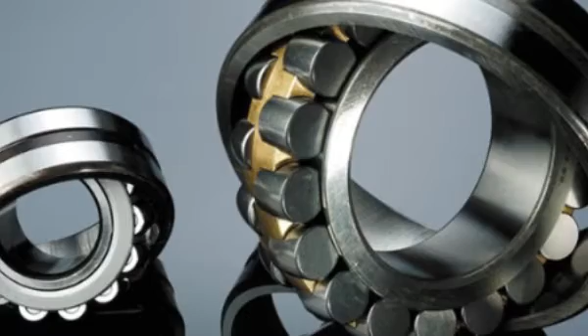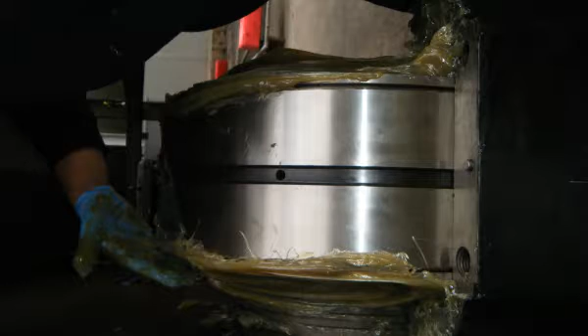Lubricating rolling bearings is one maintenance task that deserves our attention. For those involved with reliability, asset longevity, and energy conservation, getting this job done right means everything. Still, lubrication of rolling element bearings remains a misunderstood and abused task. Can it be true that 40% of all bearings never live to their engineered life cycle, and bad lubrication practices are the leading cause of this infant mortality?

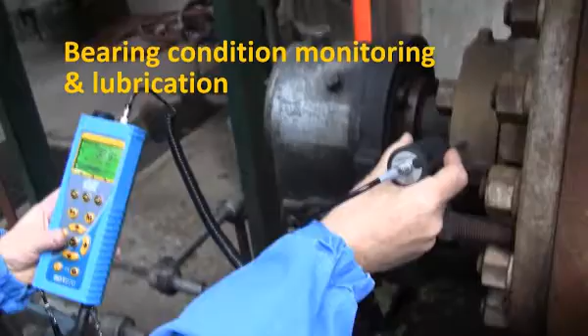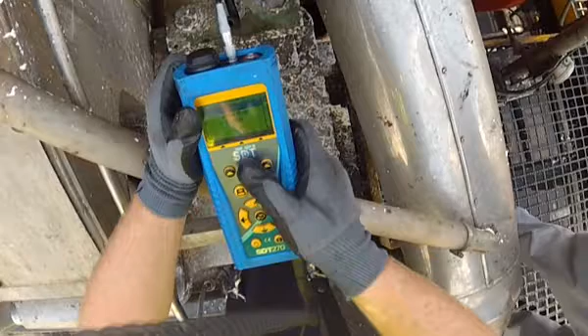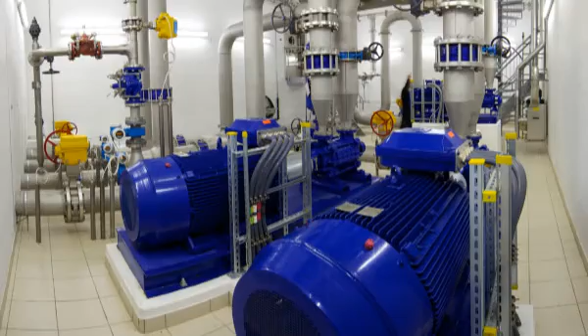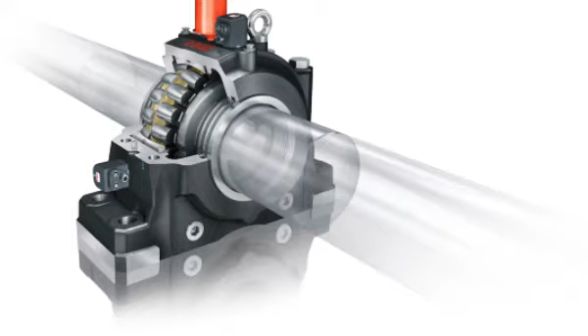Friction is all around us. Without it, we'd find it very difficult to run, walk, or even stand on our own two feet. We need friction to drive our cars and fly our airplanes, and we need friction for our motors to drive pumps. But when it comes to our plant, machinery friction is both friend and foe. If part of your job is greasing plant machinery, then you know well the battle against frictional forces that threaten the useful life of rolling element bearings. And you definitely want to avoid these three common lubrication mistakes.

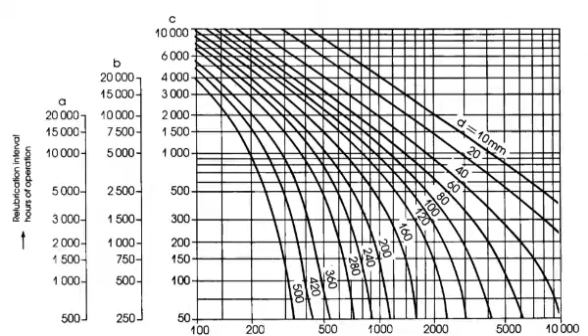Mistake number one: scheduling lubrication tasks on a calendar basis instead of a conditional basis. Greasing a bearing once per week or once a month may seem like a sensible thing to do. After all, performing scheduled maintenance at regular periods is an age-old concept ingrained early on. Even OEMs still advise best practices based on time intervals to ensure maximum asset lifespan. Are they right? Or does their advice steer us in the wrong direction?

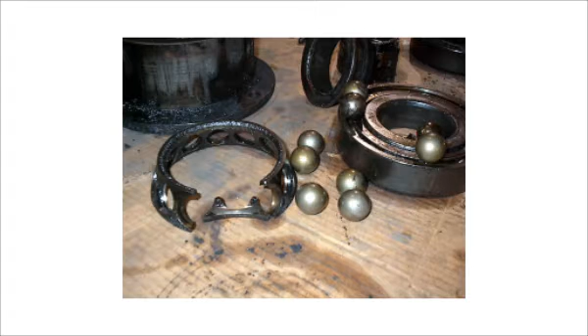Bearings need grease for one reason only: to reduce friction. As long as the lubricant is performing that service well, there should be no need to change it or add more. Yet we frequently do, with potentially catastrophic results. Relubricating a bearing just because your calendar told you time's up is the first mistake you must avoid. Don't let your calendar overrule common sense. Instead, monitor, measure, and trend friction levels and predict precisely the right time to grease.

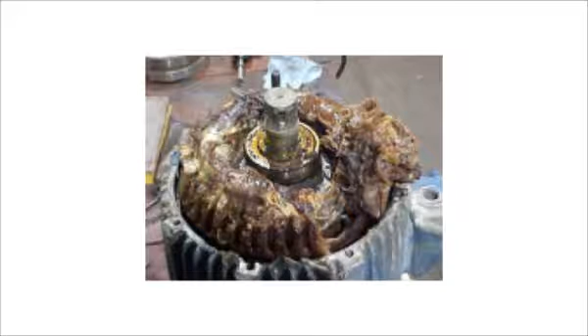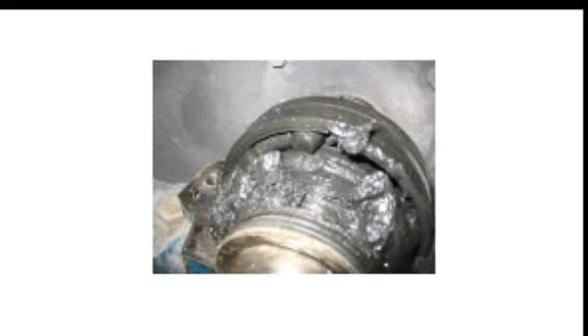The second mistake is adding the wrong amount of grease. Sometimes we add too much, other times not enough. Both are wrong. Too much grease builds pressure, pushing the rolling elements through the fluid film and against the outer race. The bearing has to work much harder to push the rolling elements through a mud bog of grease.

Imagine for a second you're running along a beach, ankle deep in water. Your legs effortlessly drive your feet with each step while a small amount of water splashes coolly around your ankles. You feel as though you could run forever and never get tired. Now imagine running knee-deep or even waist-deep in water. Your legs tire quickly. The water surrounds you and makes movement feel awkward and unnatural. You might grunt, you might groan and strain until, after a few seconds, you give up from exhaustion.

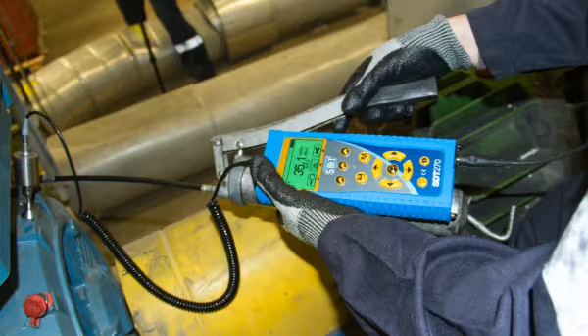A bearing drowning in grease will run hot. Excessive heat breaks down the grease. The whole system is an inefficient waste of energy. How do we avoid this mistake and stop at just the right amount of grease? By monitoring the bearing's friction level with ultrasound as new grease is being applied. As new grease flows into the bearing cavity, a measurable change in ultrasound levels is measured, heard, and recorded with an SDT LubeTech kit. As the decibel level approaches normal baselines and stabilizes, you know only the needed amount of grease has been added.

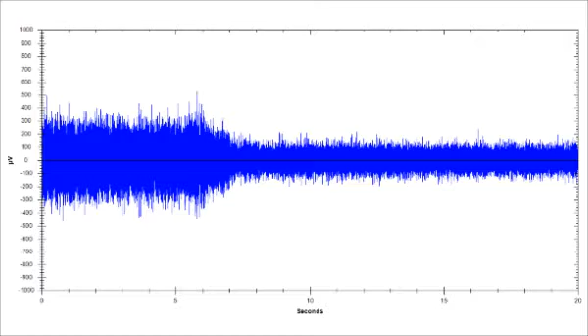Like any job, there's a right way and a wrong way to do things. Simply listening to a bearing with an ultrasound device that gives no quantitative feedback is a recipe for disaster. The audible feedback is too subjective to draw any comparative conclusions. No two people hear the same, and there's no way to remember what the bearing sounded like a month ago.

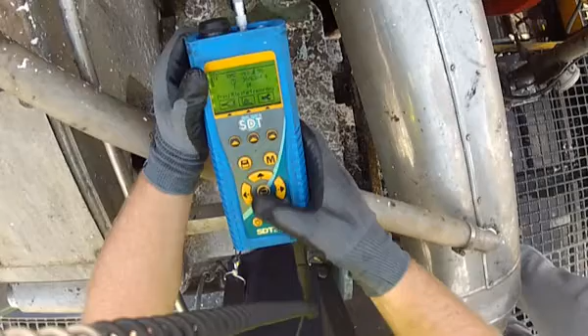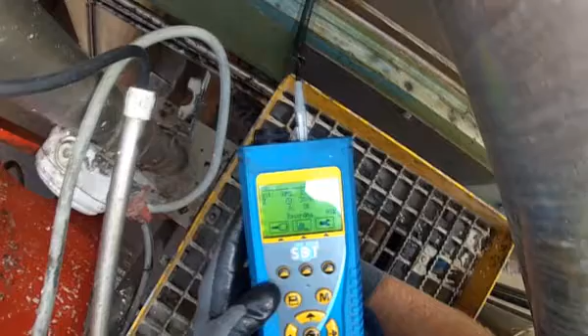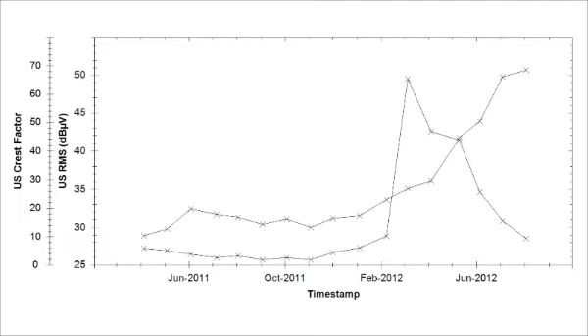So what's mistake number three? Sacrificing quality for price. Always use an ultrasound instrument that provides a digital decibel measurement. Do not rely on stethoscopes, screwdrivers, and listen-only ultrasound instruments. Better still, use a device that provides multiple condition indicators. Max and peak RMS decibel measurements indicate alarm levels and greasing intervals, while ultrasonic crest factor provides insight about the bearing condition in relation to its lubricant. Crest factor helps us differentiate between bearings that need grease and bearings that need to be replaced.

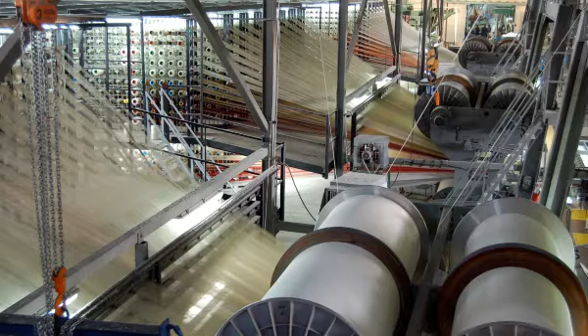Bearings reside in noisy places—deafening, really, with so many sources of noise coming from all directions. Humans are simply incapable of filtering the sound of a grease-starved bearing from other sounds. Even if we could, how would we measure the results, or compare what we hear today against what was heard a month ago? The days of listening to a bearing with a stethoscope, screwdriver, or broomstick are over.

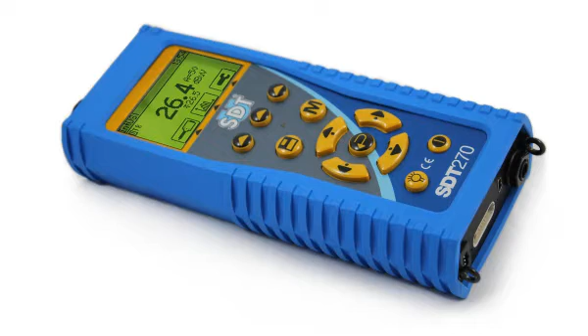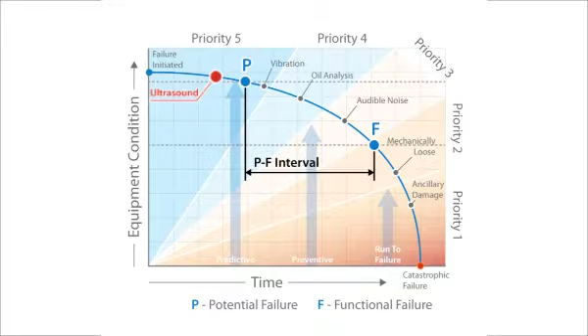There's just too much at stake to rely on antiquated methods. But noisy environments are where high-quality ultrasound instruments thrive—these are the challenging situations they were built for. Take, for example, the SDT-270. It hears above the noise of the factory floor and concentrates on a narrow band of ultrasonic frequencies. Friction and bearing defects first reveal themselves in this frequency range. The SDT-270 accurately filters, measures, stores trends, and alarms the earliest signs of lubrication and bearing failures, making it the ideal tool to predict greasing requirements.

It does so by providing 4 relevant data sets we call condition indicators. Condition indicators characterize the health and performance of a machine and provide more insight as to what has changed. The first condition indicator is overall RMS, reported in decibels per microvolt.

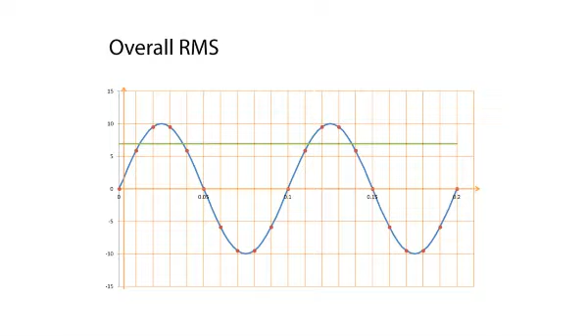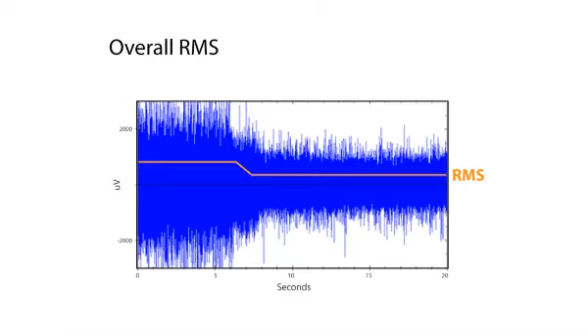Overall RMS is an averaged calculation of negative and positive values collected over a specified sample time. That sample time is defined by you, the ultrasound inspector. The SDT-270 reports the RMS by buffering 250,000 samples per second. This condition indicator characterizes the energy inherent in the ultrasound signal. RMS incorporates both friction and impulsive ultrasound over the sample time. It's a stable and repeatable value, making it an ideal value to trend and alarm to.

The next condition indicator is max RMS. We also calculate that in decibels per microvolt. The SDT-270 actually calculates RMS 2 ways. The first I just described—it's an overall value for a specific time frame sampled at 250,000 samples per second.

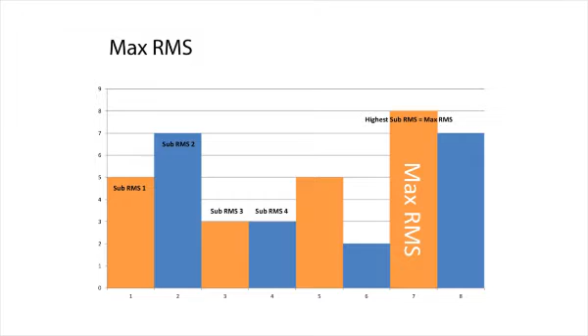The second we call a sub-RMS. The sub-RMS consolidates the RMS into blocks of data 250 milliseconds long. So an RMS collected over 1 second would contain 4 sub-RMS blocks. The loudest block reported represents the max RMS. The max RMS is used to compare against the RMS to determine if the signal is stable.

The next condition indicator we call the peak value. It's the maximum instantaneous value recorded during the measurement cycle. Since the SDT-270 takes 250,000 samples per second, the peak condition indicator is extremely sensitive to any abrupt variation. This makes it really useful for detecting impacts produced by early stages of bearing failure.

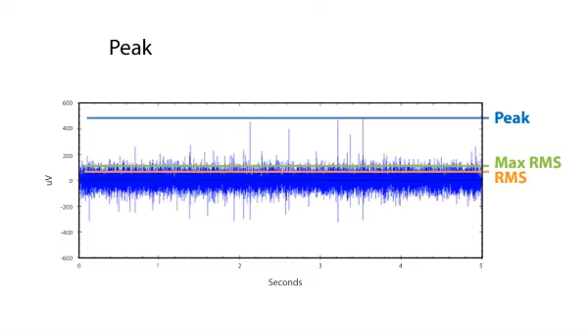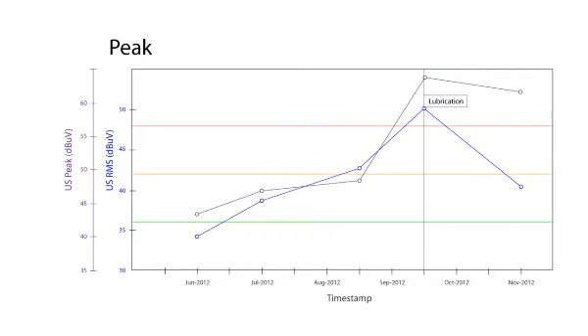For example, let us say that an alarm was triggered when the RMS value exceeded 8 decibels per microvolt over its baseline. If lubricating that bearing returns its RMS condition indicator to baseline, but the peak value remains elevated, this is an indication that the alarm was triggered by more than just lubrication issues. The bearing is entering early failure stages.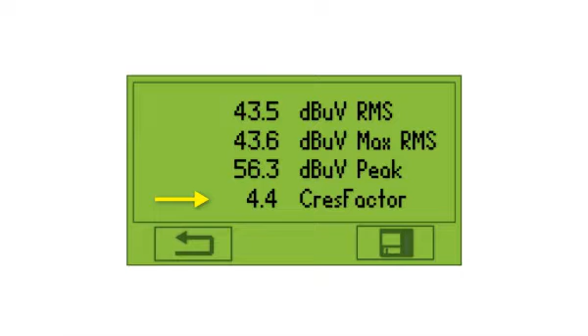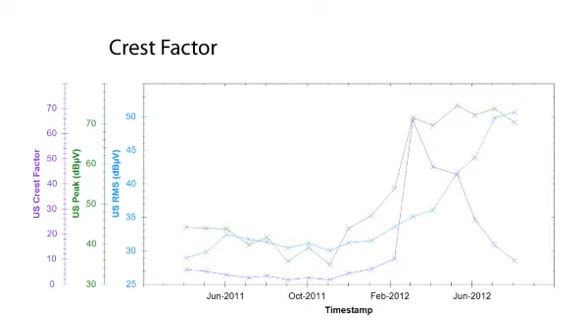The fourth condition indicator is crest factor. Crest factor is simply calculated by the SDT-270 as a linear ratio of the peak value to the RMS value. The beauty of the crest factor is how it reacts to unstable bearing signals. This makes it useful for estimating the failure severity of bearings and gears.

When ultrasound inspectors put all 4 condition indicators to work, they have the power to predict lubrication requirements based on condition instead of time. RMS tells us when to grease, and more importantly, when to stop greasing. Max RMS and peak give an indication that an increased RMS value may be more than just friction at play. Crest factor helps track the evolution of failure from first to final stage. SDT's condition indicators present a fuller picture of bearing condition and take ultrasonic decibel metering to a new level.

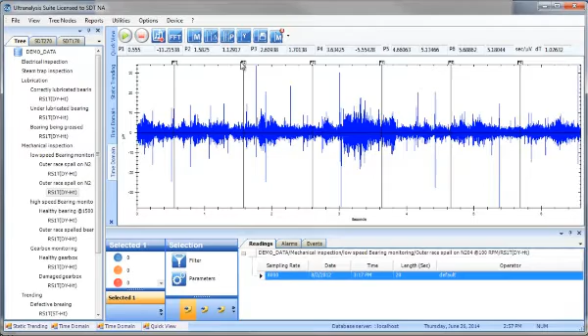For those who want analysis beyond static condition indicators, SDT offers dynamic data analysis. Static condition indicators are useful for trending and alarming, but dynamic data analysis goes deeper and provides a visual representation of the ultrasound signal. Ultrasound data presents well in the time domain. Visually, it helps explain changes in static condition indicators.

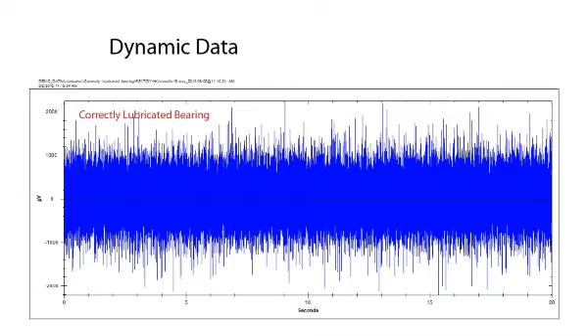To demonstrate, let's take a look at two identical bearings. One of the bearings is correctly lubricated and the other is under-lubricated. We captured dynamic signals 20 seconds in length for each bearing. The first thing we need to do is scale the y-axis of each time graph identically so we can compare them side by side meaningfully.

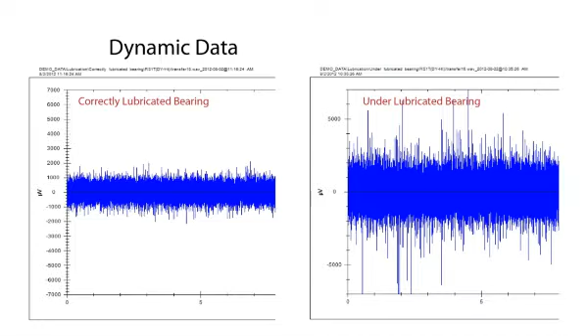Let's look more closely at the correctly lubricated bearing first. The static RMS condition indicator is 51.2 decibels per microvolt, and the max RMS is similar at 51.7. A peak ultrasonic value of 67 is notable, but not alarming, and the crest factor is 6.17.

Now compare this to the companion under-lubricated bearing. Overall RMS of 57.8 and max RMS of 58.7 is about 6 decibels higher than the correctly lubricated bearing. The friction level is 2 times higher in the under-lubricated bearing. The peak level is 12 dB higher, which is 4 times higher than 67.

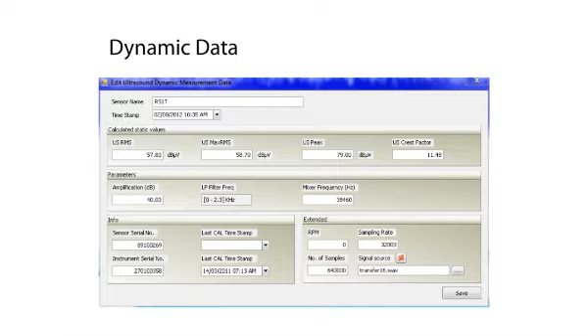What happened when, using our lubrication procedure, we attempted to restore an under-lubricated bearing to optimal conditions? Since bearing 2 data suggested it was in need of lubrication, our lube tech did just that. The result is visually obvious.

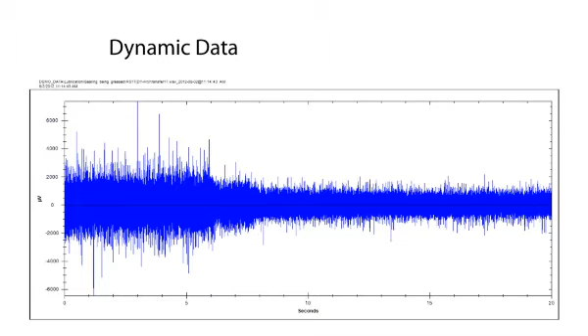The grease first reached the rolling elements at the 6 to 7 second mark. By the 10-second mark, the bearing was noticeably quieter, and the sharp peaks from bearing impulses were now considerably smaller in amplitude. Let's take a look at creating an ultrasound greasing program.

Success is dependent on organization and commitment. Without these two structural elements, your ultrasound lubrication program will find difficulty getting traction. However, with well-organized execution, the program will be on a solid footing from the outset. Getting commitment from all levels comes much easier when a program can demonstrate structure and cohesion. Results will prove the program faster, which will trigger easier access to funding to grow and sustain the program.

There's only one clear way to create organization around a project, and that's to define goals. So start by asking: why are we starting an ultrasound lubrication program? And what rewards do we expect to reap? There's no one easy answer to that question, and probably several that make sense.

Saving money is an obvious benefit that gets the attention of management, but it's not specific enough. How will an ultrasound lubrication program save your company money? By reducing grease consumption, by raising awareness of the right types of grease to use, by making more effective use of lube tech's time, by extending bearing life, by decreasing energy consumption from overgreased motors, by contributing to a mentality of best practices that positively infect other aspects of your business.

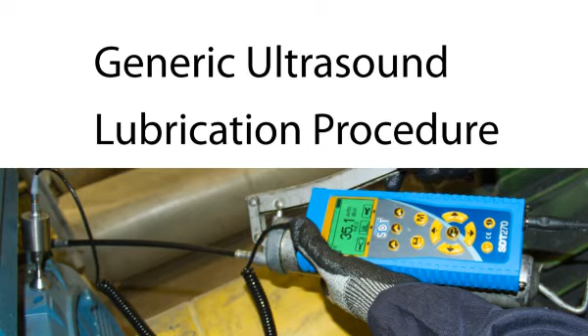SDT has published its recommended best practice for lubricating bearings on an ultrasound condition basis. Every plant is different, but there are basic similarities that make a general procedure for ultrasonic lubrication relevant. This general procedure is meant as a guideline to build out a more specific procedure for you. This may be an exercise best undertaken with the guidance of your ultrasound implementation consultant. At the end of this presentation, you can request your own copy of SDT's ultrasound lubrication procedure.

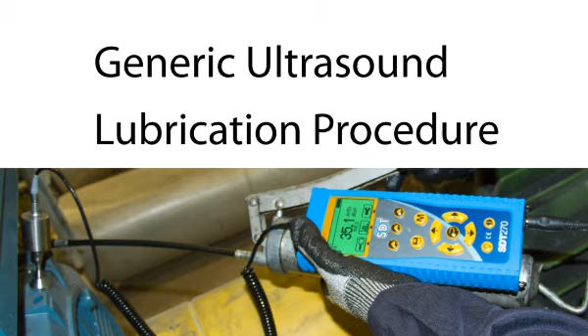How often should machines be greased? Well, there's no easy one-answer-fits-all to this question. Presuming that full faith in ultrasound condition-based relubrication is engaged, we can approach the answer with this simple logic. Why do bearings need grease? To reduce the frictional forces between the surfaces of the bearing's rolling elements.

So when does new grease need to be added to a bearing? When the bearing's frictional forces increase beyond a set quantifiable level. What is a reliable and easy to use technology that determines changes in frictional forces? Well, ultrasound. Back to the original question then.

How often should machines be greased? The answer must be when your ultrasound technology reports an increase that's 8 to 10 decibels louder than your established baseline. Knowing that 6 decibels over baseline represents a 2 times increase in frictional levels, 8 to 10 decibels RMS is logarithmically and logically an intelligent point to create a relubrication interval alarm.

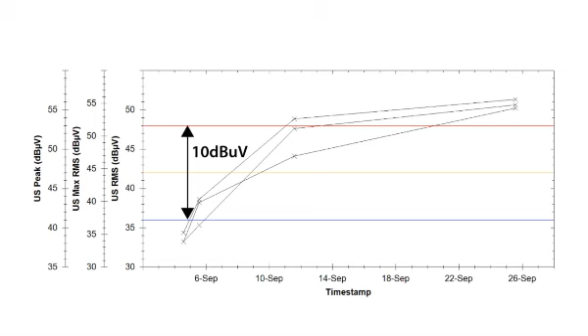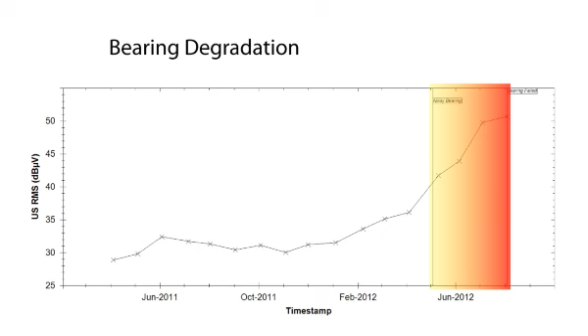This should have triggered an alarm for intervention. Lubrication of the bearing at this point to return it to baseline may prevent a further breach above 50 decibels and the next stage of bearing failure.

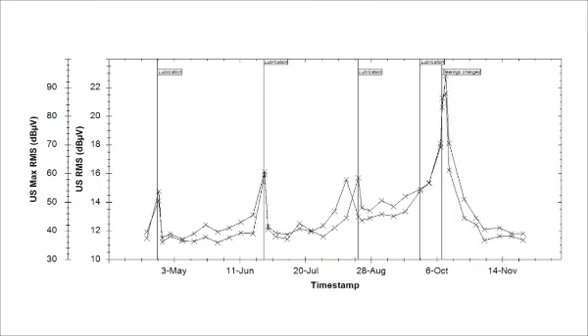Avoid these 3 common mistakes: grease on a conditional basis rather than a time basis, add the right amount of grease without over-lubricating, and use a digital decibel metering ultrasound detector instead of a listen-only tool.

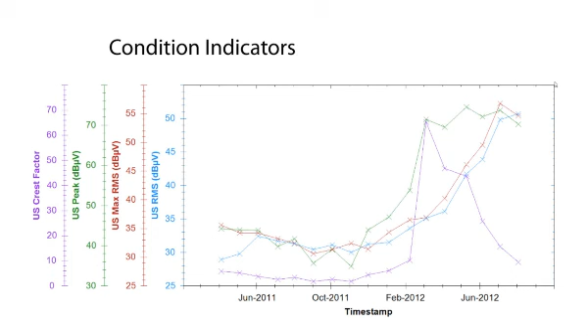Now you're well on your way to establishing a world-class condition-based lubrication program. Next step: request a copy of the SDT lubrication procedure and a copy of the SDT lubrication handbook.